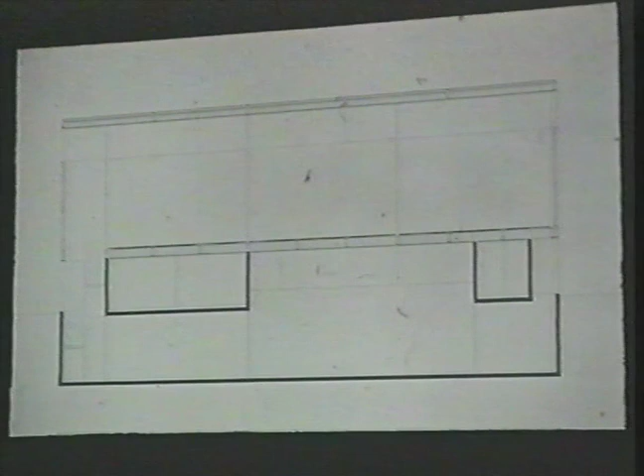In section it's very simple, almost primitive. It shows the line of the garden at pedestrian level, that we have two identical spaces through which we have these two tunnels which cut through. This provokes the reading that we have something solid which stands on these two bars. At the same time we create two identical spaces, so that once you stand in the basement, you don't have the feeling of being in an inferior, less important space. Walking through the building you have a very homogeneous impression, which we absolutely wanted to create here in a small gallery — in a large building that would be terrible, because it would enhance the claustrophobia we would like to avoid, but in a small gallery this certainly is an advantage. You see these two pieces, these two kind of tunnels which cut through what I called the box.

One of these tunnels works as an entrance area, kind of a lobby, from which stairs go up into the upper gallery or down into the lower gallery.

That stair which goes up also reveals some more complex interior space than one would expect from the outside. This stairwell also works as a gallery where very often the curator, the client, Ingvild Götz, starts their exhibitions. In fact, she uses this private gallery as a kind of Kunsthalle, a private Kunsthalle.

For instance, for a show with Cindy Sherman, that's where the stair comes up, and that's one of the first, the first upper space.

The light bands we saw from outside as part of this overall box can be seen inside as a light band which gives daylight from the top in a very homogeneous way. The advantage of this system is that we have walls and ceiling in the same material, which enhances a very simple, very calm exhibition space, which in this case we wanted to have.

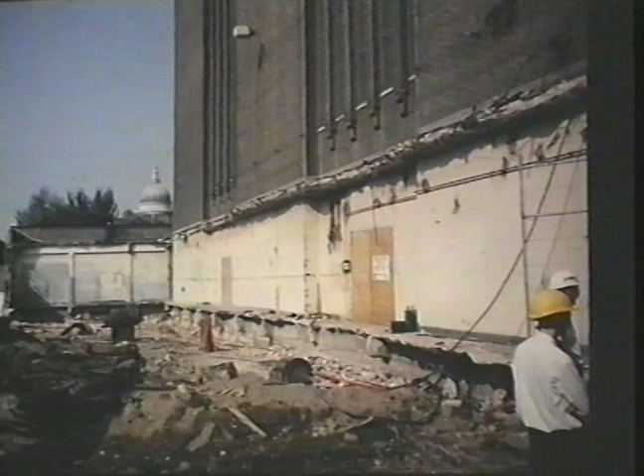Another thing is we take buildings away which were sitting around this big building in order to keep people away. Starting to take these low-rise pieces away, you start to understand this connection towards the city—where is the city, in fact? You start to understand.

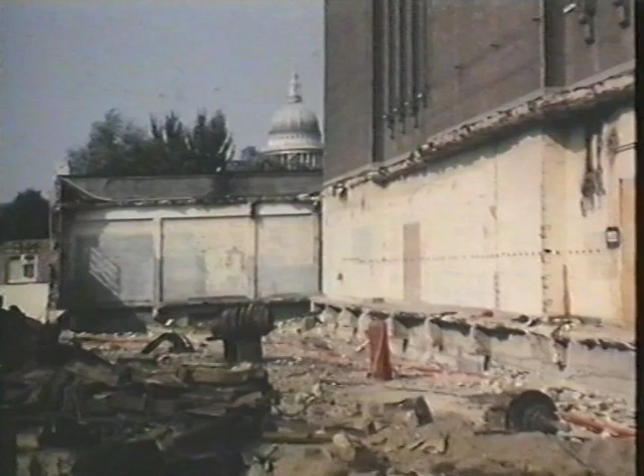And you can see, once you touch this big thing, it's really like digging out a mountain. This was a very important discovery, because we worked a long time on it and tried to change windows and touch the surface of it. Whatever we did, it was ridiculous—it was too strong, too heavy, too massive. So we tried to find other strategies to deal with this mass.

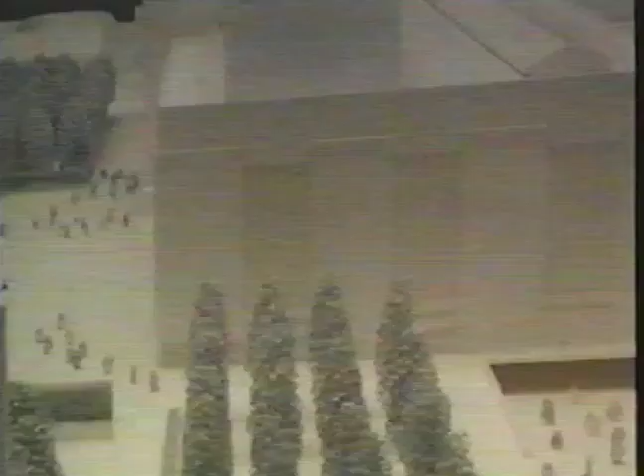We enhanced it, we dug it out. We made a big ramp which enters the building from underneath at its lowest level, which was not existing there. We can see that later. So you walk underneath, making this big mass even more impressive.

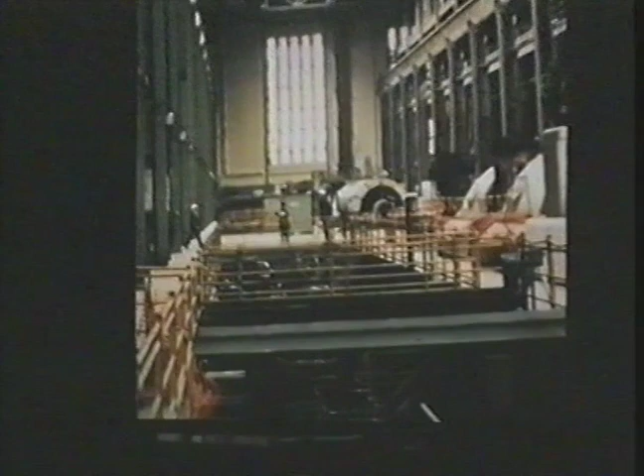We saw the turbine hall and thought, this is an impressive space, but let's make it even bigger. We took out this whole floor, so we literally dig it out and go down into almost the stomach of the building. That's where the ramp goes down.

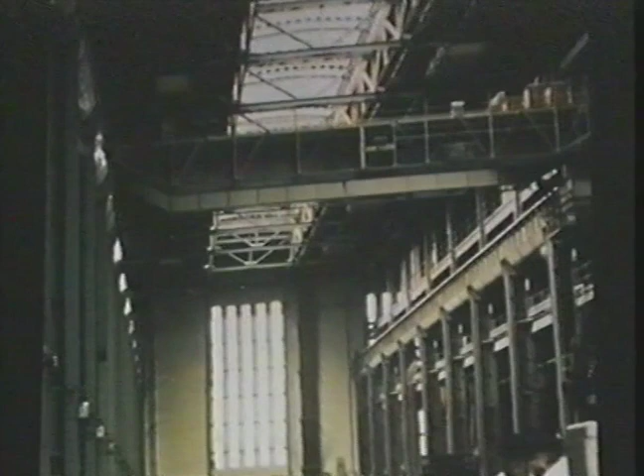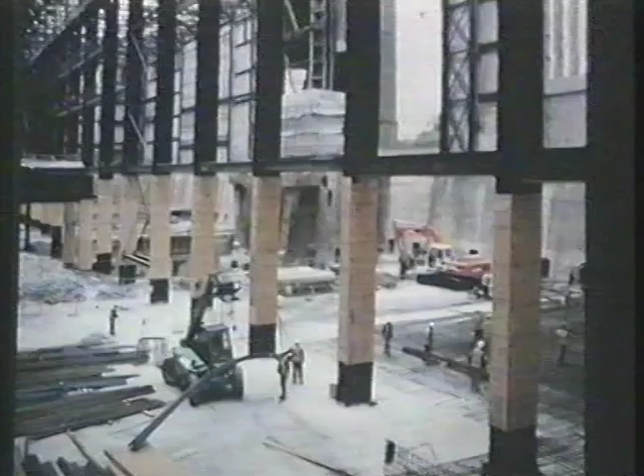This whole space, the turbine hall, the former turbine hall, will remain empty as a kind of big station where people can walk through, take a cafe, or meet people. It also has art in there. It could be big art, large scale, but it could, and that would even be more attractive I think, very small scale art. On that side, which is the former boiler house, the galleries will be fully packed. The void, the empty, and the full.

In the later stage, we will also have galleries on this side, so that going down the ramp you have a whole world that you enter, a city where you can go to different types of spaces, different types of art, different types of meeting points, etc.

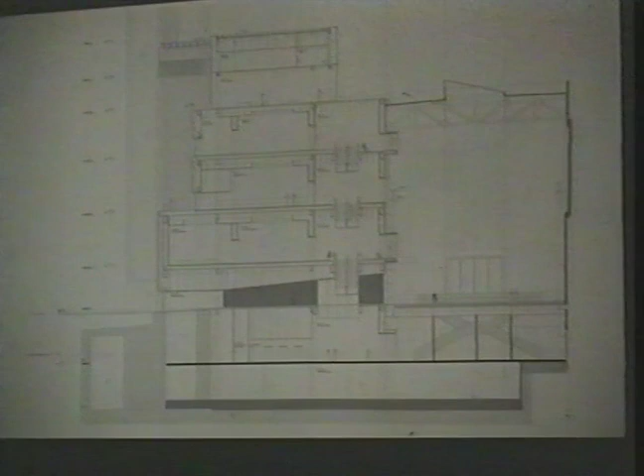This is a section where the switch house is missing, this third layer. This is the turbine hall, which is in the middle, which is empty, and the boiler house, which is packed with galleries on levels 1, 3, 4, 5. This is the top gallery, which all belong together. And this is level 2, where we have restaurant and cafe and auditoriums and different other spaces.

This model shows in which way we deal with the new wall, which is between the turbine hall and the boiler house, and in which way we deal with these massive steel columns, which you mostly see in a perspective way. So when you look from the side, you almost only see these huge columns.

Instead of fully glazing the whole wall, we make it kind of a dark wall through which we cut big windows which stand out, which sort of almost bite through the structure. Those are all glazed big pieces which in some way are from the same family or the same language as the light beam on top.

These are all glass without any framing, all glass pieces, which are also working like big screens. So once you come into the museum, you can look at this big wall and understand where you would like to go and which kind of show you can see.

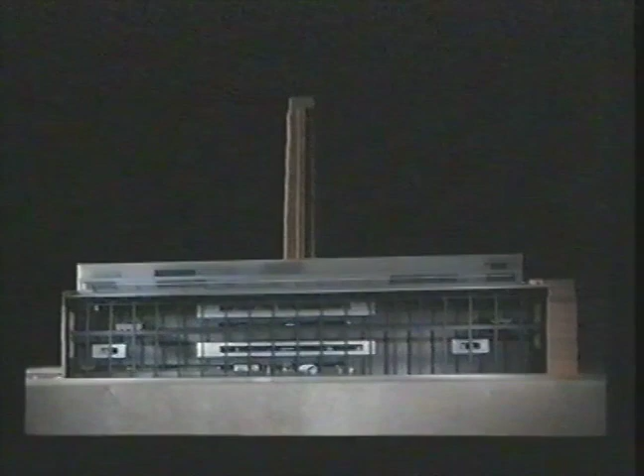When you go down the ramp, you can see these different big windows which show where people are, show the light, and show where the art is. They are like big monitors, like what we have on top.

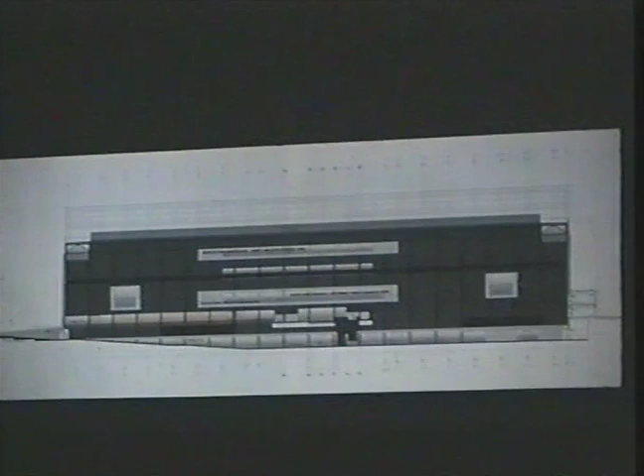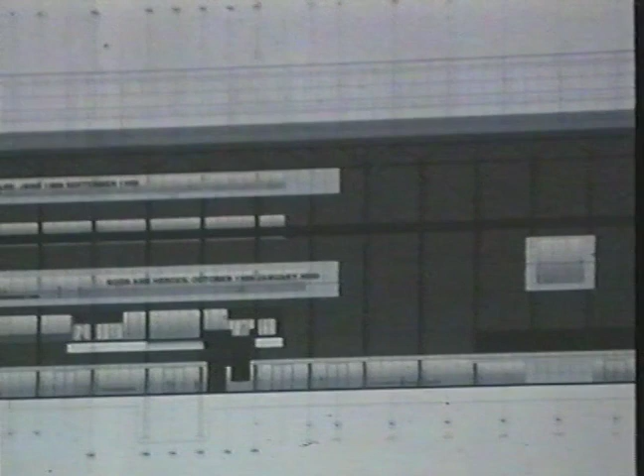So the strategy is to leave these steel and brick pieces and dig them out, and add these glass pieces which cut through in such a way they are even neglecting the existing, because they just literally bite through the steel mass.

The galleries and the concourses and so on and so on.

And one of the galleries which shows the type of ceiling we are thinking of.

It's a gallery type that we have built for a friend, an artist, Zaugg, and where we developed and tested this type of skylight, where glass panels are cutting into, are being put into the ceiling, flush with the ceiling. And again, we have the same quality of the wall also as a ceiling.

We don't have all glazed ceilings like in the 19th century and sometimes in the 20th century, where you seem to be blown through the space, and all these sometimes very expressive skylights, which we also didn't find appropriate for this building.

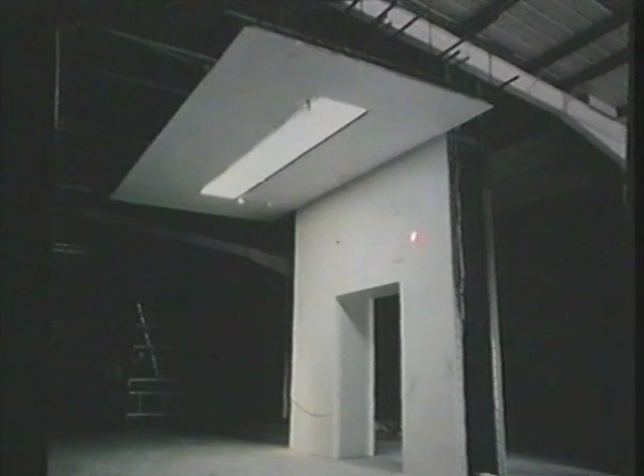We tested, as with everything, full-scale mock-ups where we tested these openings. For the Tate they are much more sophisticated than the ones we did for Zaugg, because they need to fit different requirements for dark space or to deal with the sun and so on.

And those pieces seem to come out quite well. They also provide very good light, very homogeneous light, and they look very simple, very basic, very strong still. We were very happy to be able to do this studio for Zaugg so we could test this and see it in reality. We think it's a very interesting solution for Bankside, which goes well with the character of the building.

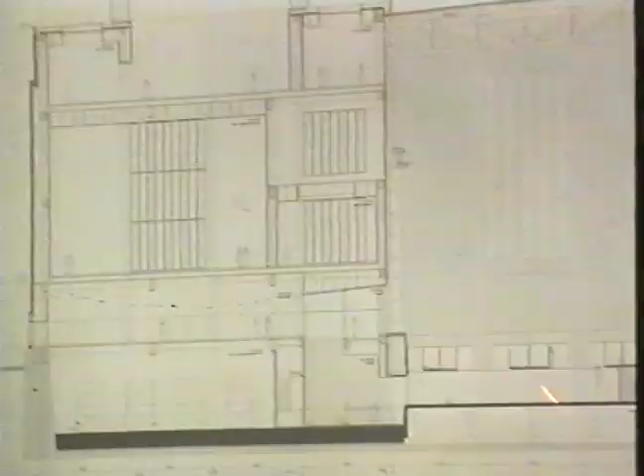You can see those galleries here which have those types of skylights, not only for daylit areas but also for artificial light. So when you stand in the building, you do not really know if it's daylight or artificial light. The light seems to filter through the whole building.

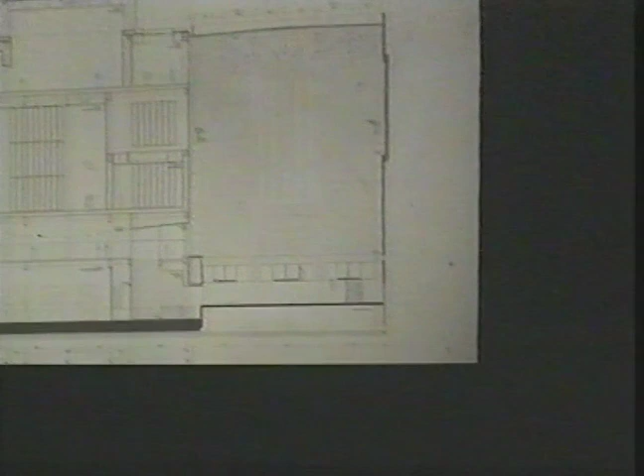We also rejected the idea of having different floor types. We always have the same maximum height, so you can have low or high floor spaces on every floor. You don't have those typical hierarchical museums where on one level you have drawings or photographs, the small-scale things, and then the larger pieces, and the higher up you go, the more you feel close to God. So we rejected this idea and worked on something as intense and powerful on every floor. We even cut into the floors and created very high spaces all of a sudden, 15-meter high spaces, which break the rhythm.

Like here, for instance, which is the full height of the existing cathedral windows of the building. So we expose the existing structure like a piece.

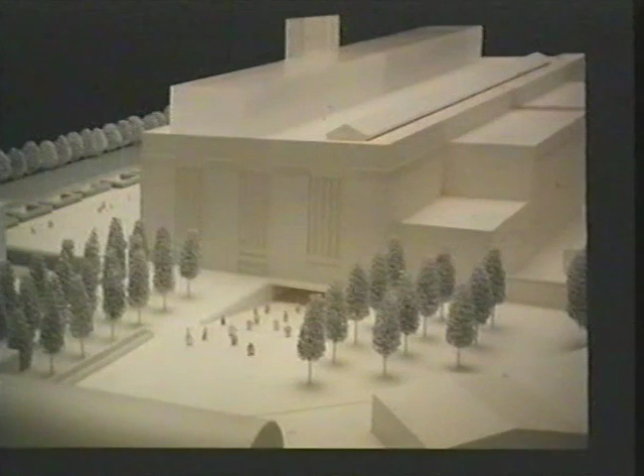That will be this window. So when you come down the ramp, you can see from the outside this huge space, as light shining through the window.

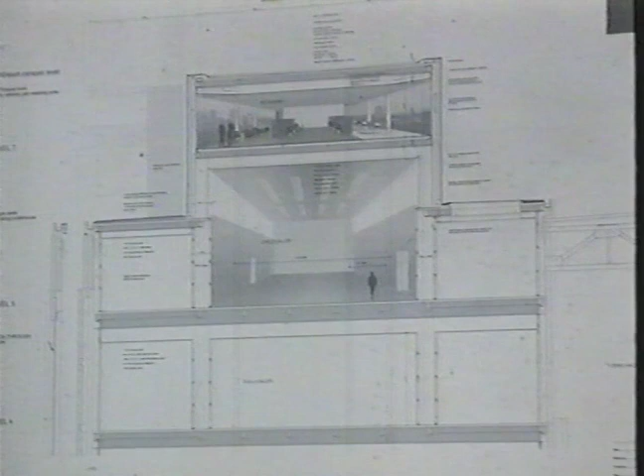The light beam is not just a light box sitting on top, but it has very different types of light in it and different types of spaces. It's like a house sitting and also cutting into the building. This shows in section a similar gallery type to the one we have for the Goetz gallery, where the daylight comes in from the side. At night, light shines through this glazing and provides a different type of light than the restaurant which sits on top, or other spaces.

So that type of glazing will be part of the light box sitting on top of the Tate. That's a model for the light box, which also will work as a screen, as a big screen.

The next project is, as I said, the studio for the artist, which helped us and served as a kind of a big mock-up. This artist studio is the studio of Zaugg. He's an artist we've done several things together with - we'll see two other things we've done together. He's a kind of conceptual artist who wrote very interesting pieces on perception, and we've surely learned a lot from him and done a lot of work with him. This very simple building is in Mulhouse, near Basel, in the agglomeration of the city, on the French side.

The building has two canopies, one towards this wall, which created an interesting space, and one sort of opening to the garden. The water is collected on the roof, as we do for many buildings in the recent past and still do, so that the building is like a natural object, like a stone in the landscape, which then changes over the years.

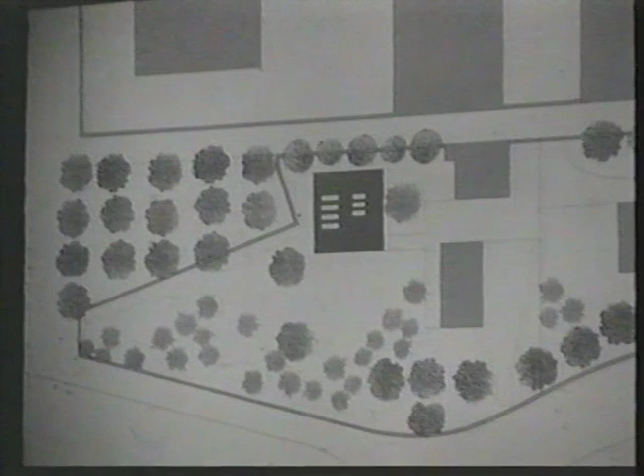Remy worked on a kind of park himself. He moved entire big trees, almost a forest, and worked on the flatness of the garden. He is obsessed with flatness, and he literally did it by hand with assistants. So the whole park, I don't have a slide of that, is like the flattest part of the world almost. And different materials are almost merging with each other.

These are different other buildings he has in the studio. The plan of the studio, storage and two studios. You can see the way the daylight, the skylights, are cut into the ceiling.

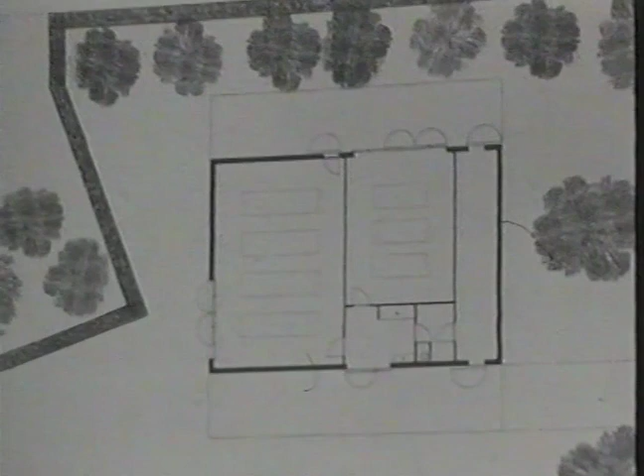The space between this wall and one of the studios, which he sometimes also uses almost like a kind of

museum. He works with text and colors, and that's also one of the reasons why we have often worked with texts in our architecture, in a way where text is related to perception, not as information, not as a kind of pop tradition, but more in the tradition of being like part of the surface, like part of what you see.

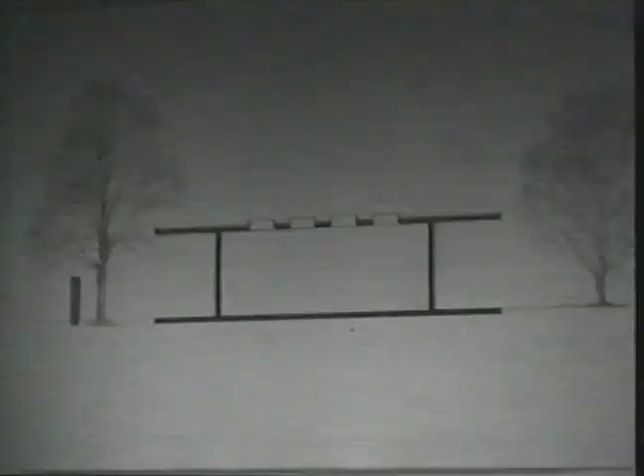In section, you can see the simplicity of these light boxes. And what I said about the flatness is nothing but the extension of the interior space into the neighborhood, done in a very radical way.

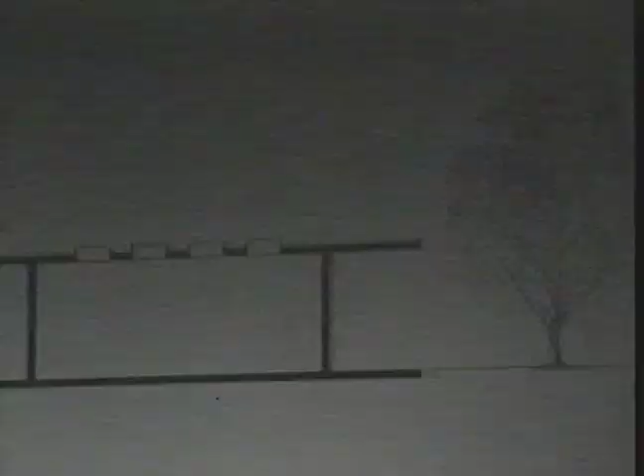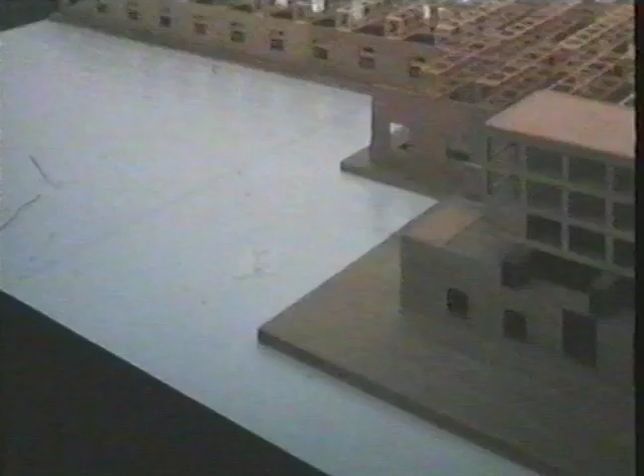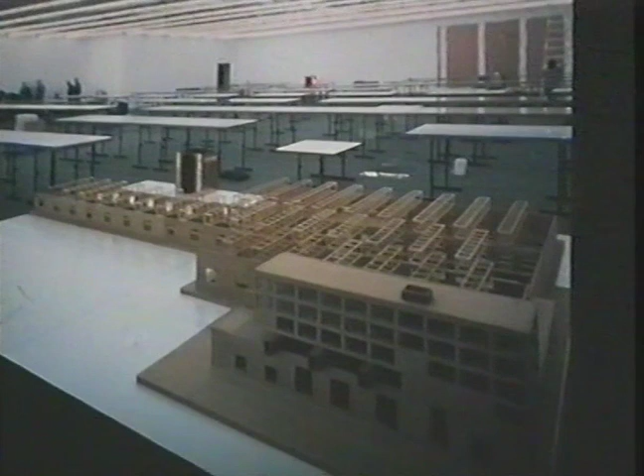The engine depot, the signal box, another signal box on which we work now, and the distance between—which is the distance in time we worked on that, but also the distance in the city. Videos, urban studies.

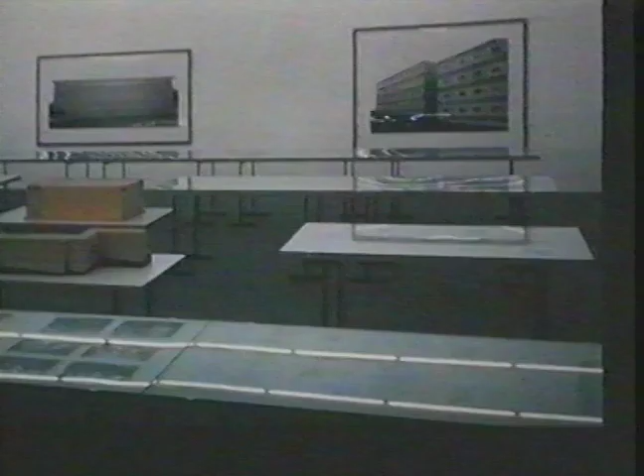Photographs by Thomas Ruff, who's another artist we have a lot of appreciation for and work with. And Rémy Zaugg, 'Mais moi, la ville, je te vois.' You can hardly see the painting.

Next project, which is the urban study I was talking about, the city of Basel with the Rhine River.

The city spreads across 3 countries: the Swiss part, France, and Germany. People live and work in different parts, but they're not really aware that this is like one city. It has Weil am Rhein, which you may know from the Vitra Museum - it's the same city. And the Beyeler Museum, recently opened a bit further out, is also this one city.

The more we worked on this urban study, the more interesting it was to understand the psychological background of that. We did the study more as a way to understand how a city works, rather than to propose specific projects. It was more like proposals to define areas where the city should grow rather than others.

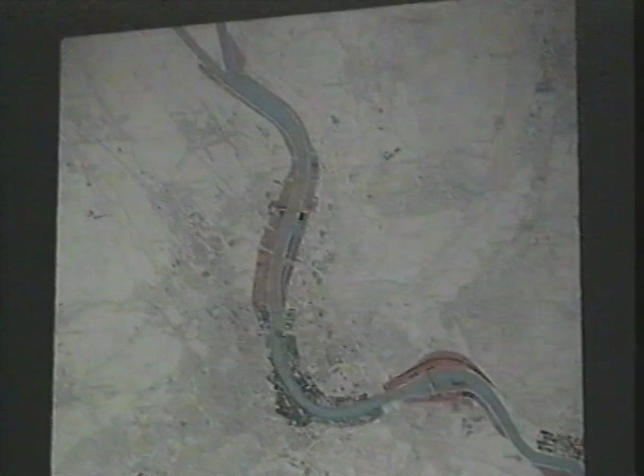You can see that from these buildings, the classical silhouette of a city. So it's obvious to go on with this, to make it the most typical element of a city. But what happened is that as the city evolved towards the north, France and Germany, and even the Swiss part - because that belongs to another Swiss canton already - the neighbors didn't touch the river anymore. They were almost scared, as if the river belonged to the old part of the city.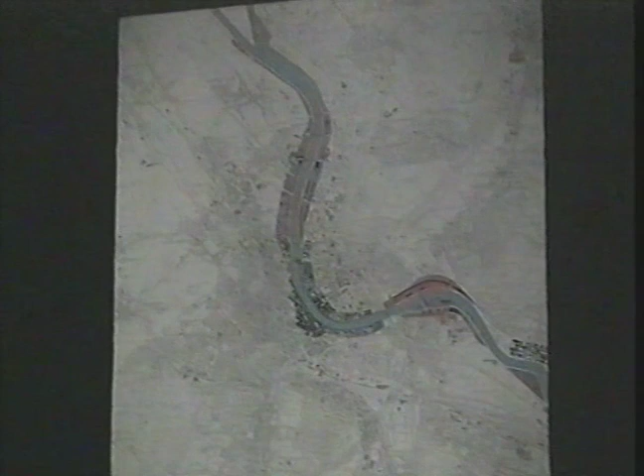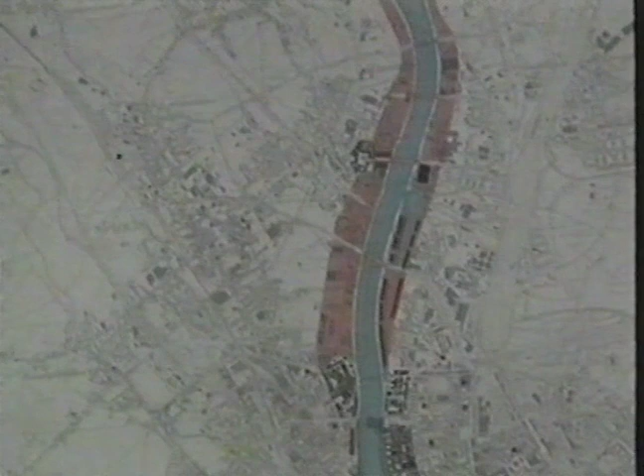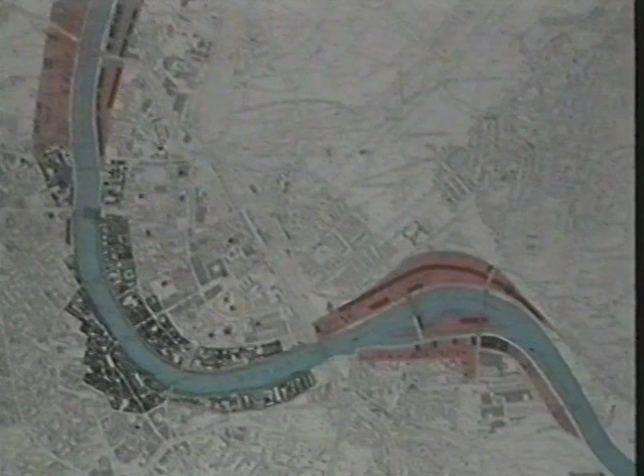In fact, most of the communities in the neighborhood are developing their schemes away from the river rather than along it. So one important element for the future will be to enhance the river as a natural given, and also as something where the city takes part - where the German, French, and Swiss parts show their faces.

Next one. For instance, like this - it's just very schematic. That wasn't so interesting for us, but it shows the forms this could take.

A second scheme we were proposing, a second element which was so evident, is the railway tracks. That's what makes the city special too. It has the German railway system, which you may know because everybody has once gone from north to south through here. And the French railway track system comes together at the Swiss station, then moves toward Switzerland or Italy.

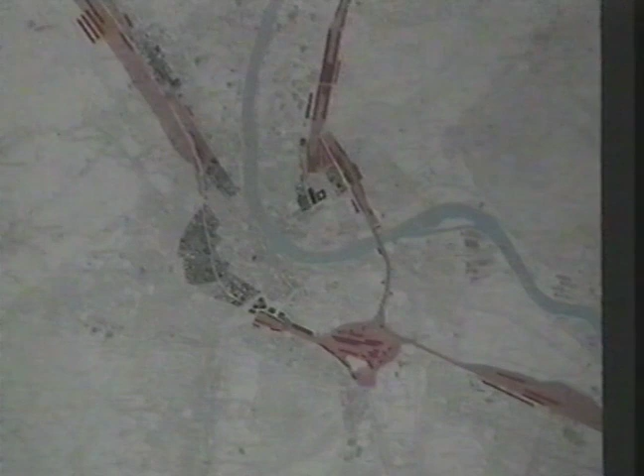The idea was to turn these fields, or the areas along these track fields, into strong urban elements, like strong vectors, so that the Rhine and these artificial river systems would create strong pieces within the overall city scheme. Such as this.

What we tried to express at the end of this study - it's a very long study and I'm just showing a few slides, we also worked on the side valleys - is that in the end the city expresses itself according to specific topographic and artificial elements which have, over years, decades, or centuries, become strong rather than others.

One extreme example is, of course, Venice, which fills out every square meter. Of course it's an island, that's why it's so clearly visible. But it's interesting as a model which fills every square meter and which, in fact, cannot be changed anymore. It's in fact a dead city, and you get this feeling of a dead city - it's beautiful, but it's dead. It cannot move anymore. But in the end, the city has grown into this shape.

This shape has an effect back on the people and also on the visitor, like a psychological pattern. You can understand everything, but the city cannot move anymore, not even a square meter. Paris is a bit like this in the center too, but for a different reason - it's almost a crystalline pattern which cannot be changed anymore. New York is similar to Venice, and there too you sometimes have this feeling of death, even though it has areas which can be changed, which can alter the character a bit. You can make it a bit nicer, but you cannot change it radically without a tabula rasa.

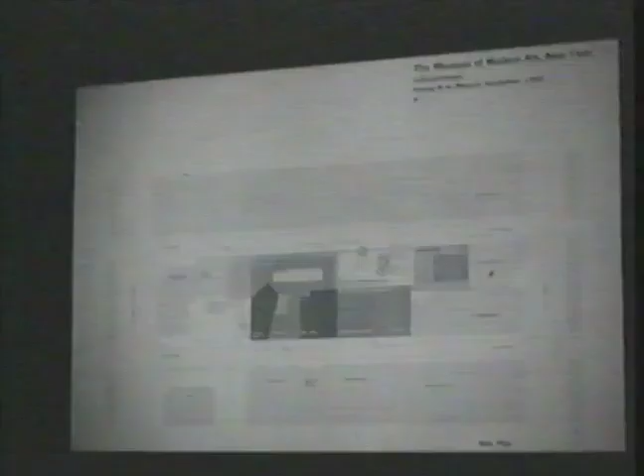The scheme is very simple: 53rd Street, 54th Street, 5th Avenue, and 6th Avenue. This is the old MoMA, the existing tower, the garden wing, and the garden. Most of the existing buildings have gone and will go.

What we did is arrange the galleries around the garden on two floors only, so you can come in around the lobby, which is double height as now, where you have art, walk around the garden and have art on the first floor, go upstairs, very simple, and have galleries right on top, on two floors, all around the garden.

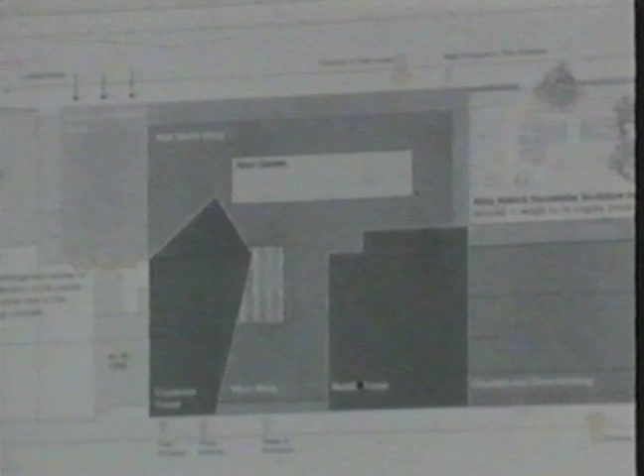All of which is curatorial would be in this building, which overlooks the whole area and is connected with the galleries through two courtyards, which sit on top of the galleries.

As I said, I don't want to explain everything, but this shows you briefly the Goodwin Stone building, which is the actual entrance, where we also provided the entrance, and also an entrance from 54th Street, so you can walk through the whole complex.

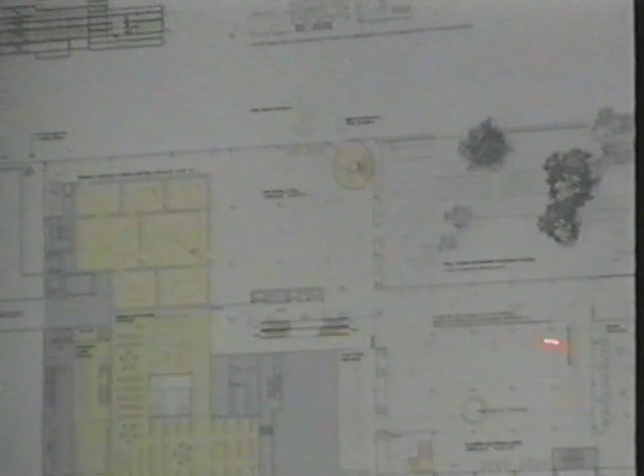Philip Johnson's building would be turned into a virtual museum. We have those round forms indicating the spaces, the stair and the big eye, as we called it, where you can look down into the basement, where we have three cinemas—one existing and two new spaces.

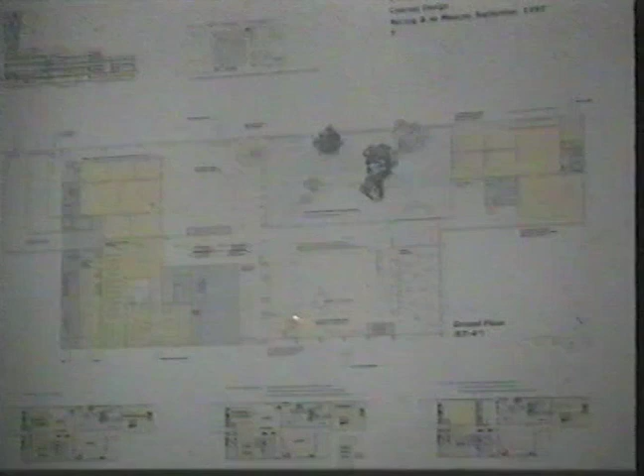When you come in, you have the garden in front of you, which is upgraded because it has art around it, and everything is embracing the garden. You have proximity to the galleries, to the cinemas, to the restaurant, and to the shop, as well as to a contemporary gallery which starts on the lowest floor.

That's the lobby, which has changed and which we wanted to turn into art space, in a way that the sculptures in the garden would historically be expanded. I mean, the sculpture exhibition would be expanded historically into the lobby, so that the sculptures which are now stopping with 1950s sculpture or even earlier would come into the lobby up to very recent sculpture, Jenny Holzer and other sculptures. So the whole garden would sort of expand onto the street.

Next one. The upper floors, third floor, and the narrative, etc., etc. Next one.

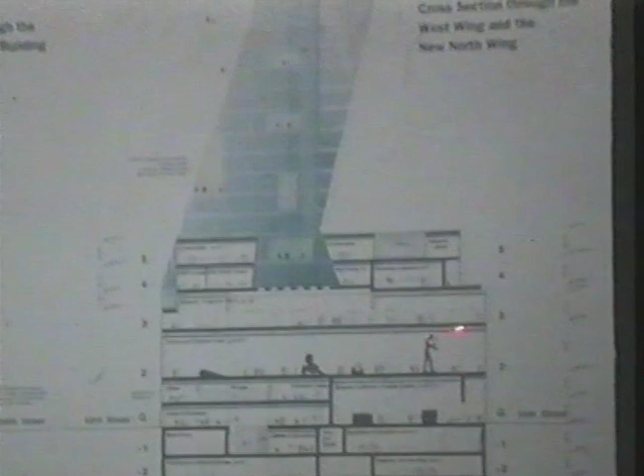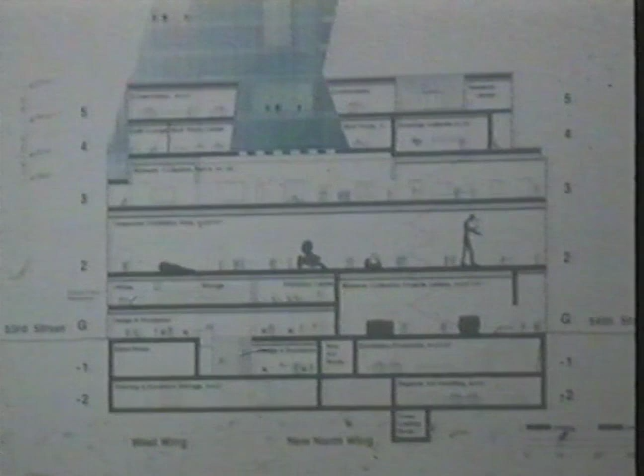And the section which we worked on in a way that you can have, within this very urban type of museum, spaces which are almost loft factory sizes, which would cut through from 53rd to 54th Street with a height of almost 10 meters, so that you could create spaces like in Marfa, like Judd has done in Marfa, in such a museum. That was a proposal for an exhibition for American sculpture in the 20th century. That's why we took the Jonathan Borofsky, just to show the scale of the whole thing.

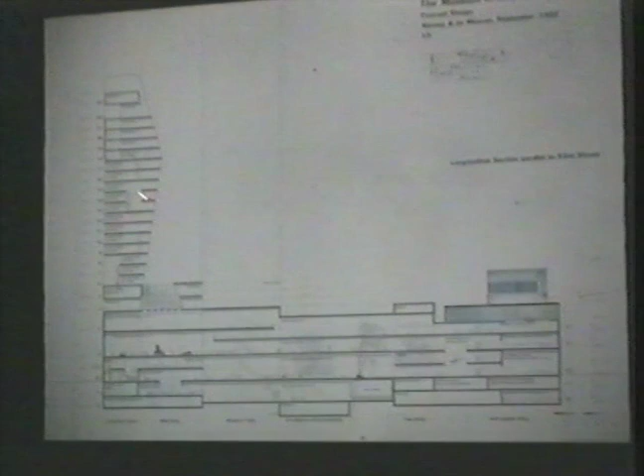Next one. Another cross-section, and the way how the tower evolves over the different floors and has different floor heights, and these sky lobbies I was talking about.

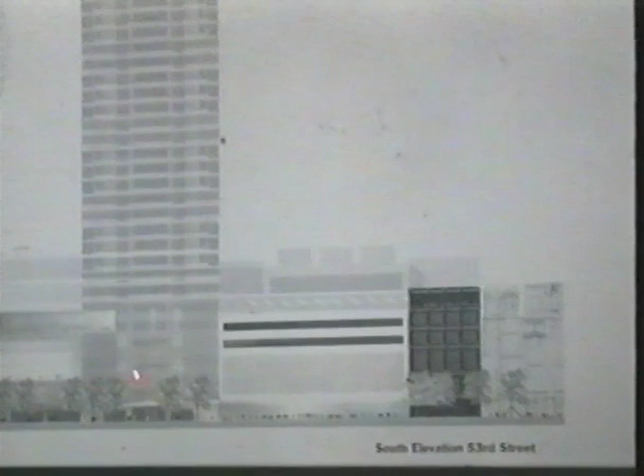53rd Street, the existing entrance, the new entrance, where because it's higher, you would get the feeling of the garden from the street, the through space I was talking about, and the curatorial tower.

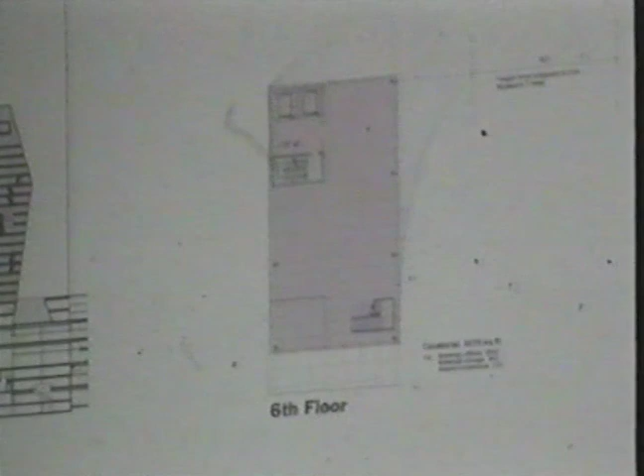Let's show a few images of this curatorial tower, because it's an important aspect, I think, which we work on in other projects, in other new projects, which shift from rectangular forms into other forms, let's say. In this case, all these lines could be defined through, as I said, air rights and zoning and so on, but at the end, of course, we were interested in creating this specific form.

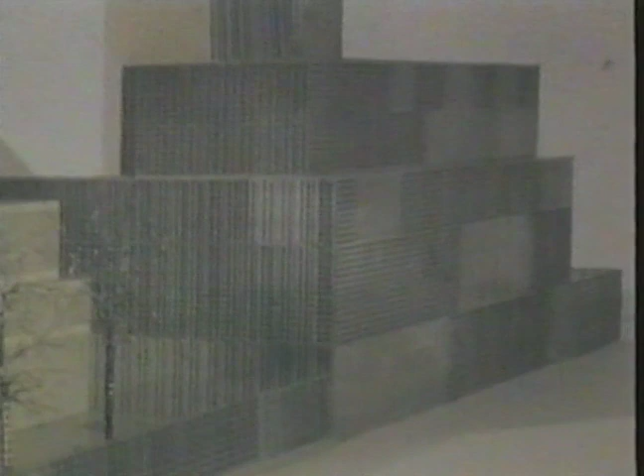Next one. From 53rd Street and 5th Avenue. Next one.

And we walk around the tower, to understand that it's difficult to understand the shape, and that we in fact did everything to cut the shape, to cut the image, the clear image you could have from the shape.

Next one. What would be the material? Glass. It would be glass and printed glass also. It would not be transparent everywhere, because it also has storage and offices. It's a mixture of different uses.

Next one. That's from 6th Avenue and 53rd Street. Next one. And again from 53rd Street, where you can see where it starts on a very narrow spot.

We think it has to do, it could be related to the signal box, which is not a tower, but it is a tower-like piece, where also we did everything to sort of hide, or not hide, but maybe blur the clear edges of the building with the way we treat the facade.

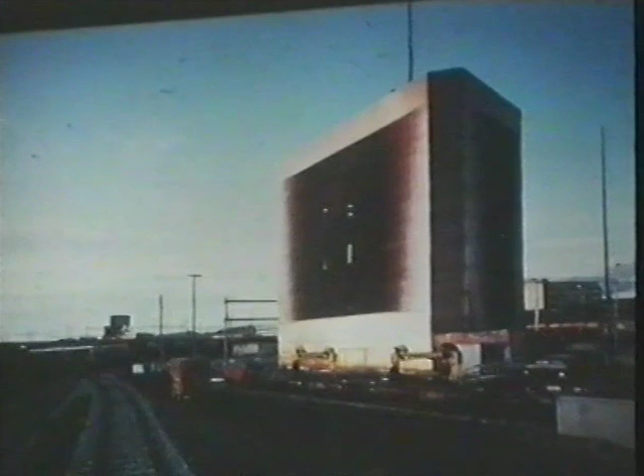Unlike in earlier signal boxes, people don't look from inside out onto the world. The world is not the, might almost say, analogical world, but it's a digital perception of the world, which happens on the monitor, which is inside. And that also we wanted to express.

You can see in which way it is not quite a rectangular piece, but the way we arranged the copper bands, and we also wrapped it around some mechanical spaces, it loses the only rectangular shape it could have.

When the night falls, the light from inside gets stronger, and it reveals the fact that it has floors and some windows, and all of a sudden it's connected to normal buildings.

And at night it's not connected with normal buildings anymore, of course. It's then really a totally independent piece in the midst of these railway fields. It sits very close to the engine depot, which I showed in the model, which in its character is very different. It's more industrial, more down to earth, kind of a building type.

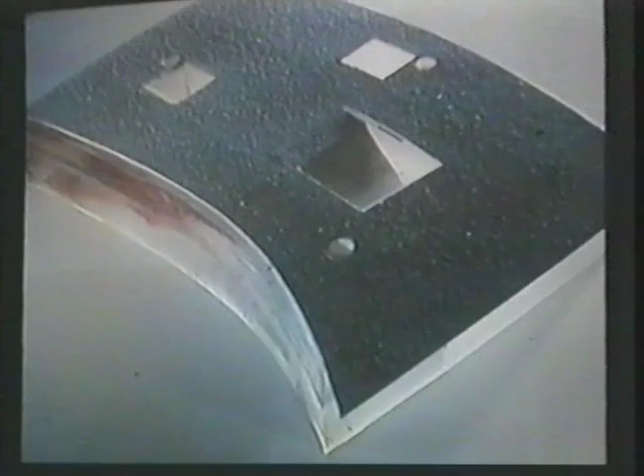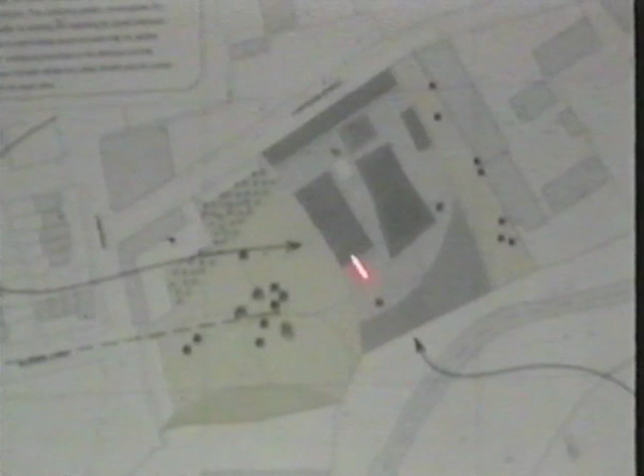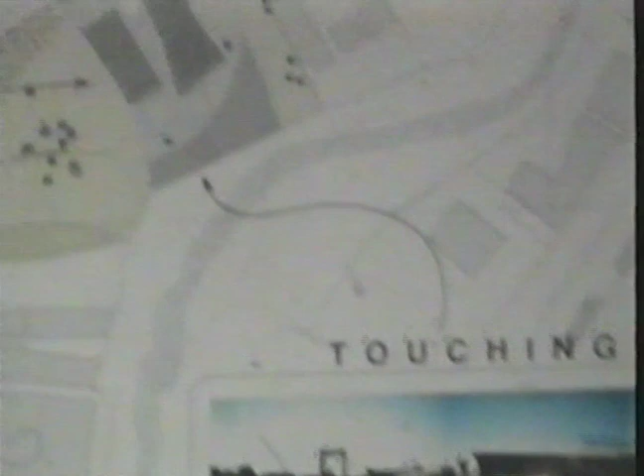This is the building, and that's the new site, which we all do ourselves. So we invented the park, and the park relates to the building and to the shape of the building. This round form has to do with the kind of park we do, which also has a slope, so that walking up the slope through the garden you perceive those tubes which sit in two rows, and then you walk over and the whole building starts to move, has a certain movement in the building.

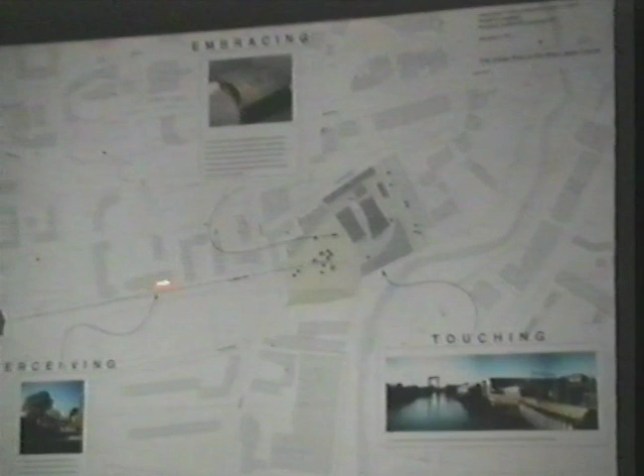So the garden and the building relate, and together this embracing gesture has to do with the garden and also with how the building relates to the few elements it has in the neighborhood. It sits on the creek, it sort of touches the creek, and the way we arrange the trees also allows for a special perception of this little church, which is quite an interesting piece in the neighborhood.

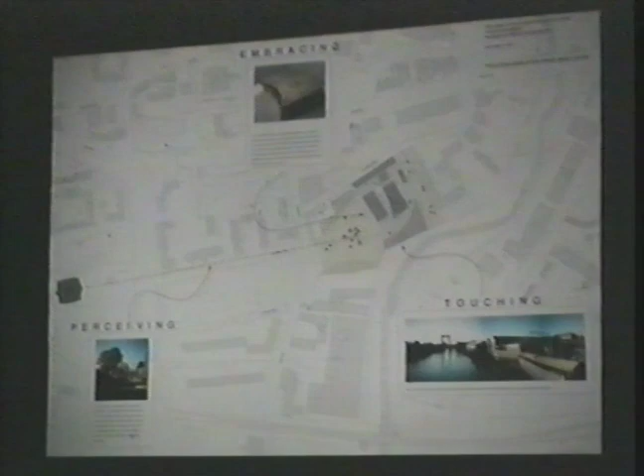So the facade, the curved facade, and the building become part of the neighborhood through these three types of gesture we sort of invented for that part.

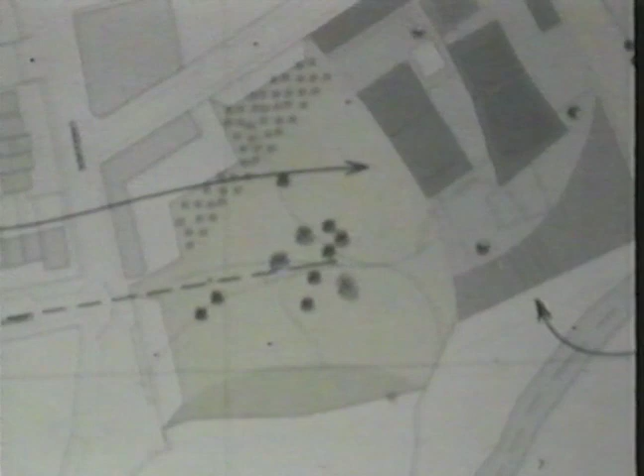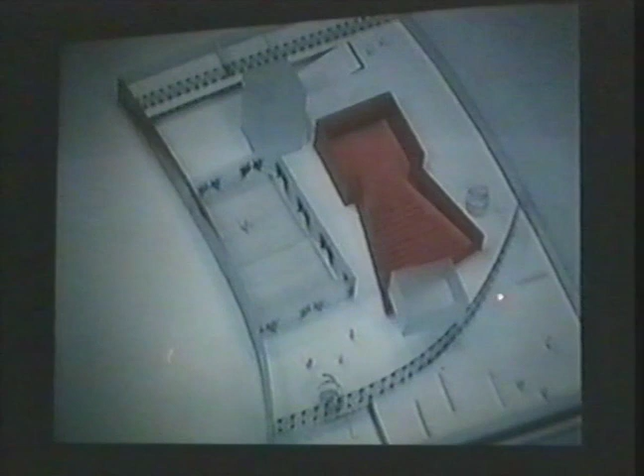The ground floor, it has two floors. The ground floor is a very open landscape type. In the middle it has a theater, which is like a heart, red painted and fitted out, a dance theater where they will have public performances. It has a library, accessible through this ramp where you go up. This has changed now in the design—now we have a ramp which goes up, and then it has the library which sits on top of other spaces. It has two studios, large studios, which are cutting into the building, and it has an auditorium and administration, and it has three very large stairs, like huge screws, about 7 or 8 meters wide, which cut through the building and connect the two levels.

The top level is the studios, which are densely packed, like two different city types—a more modern Corbusian type, and a more older type on top.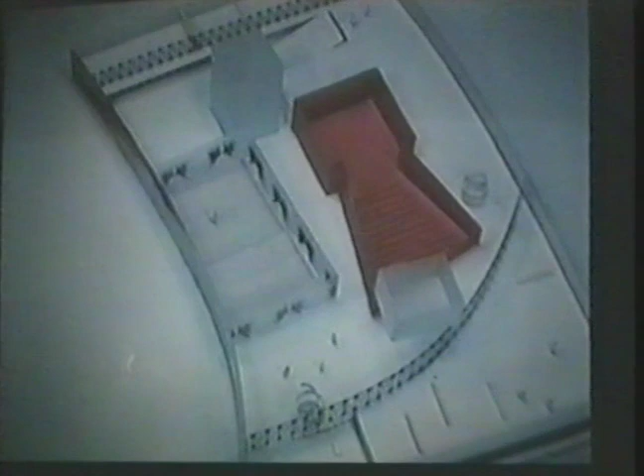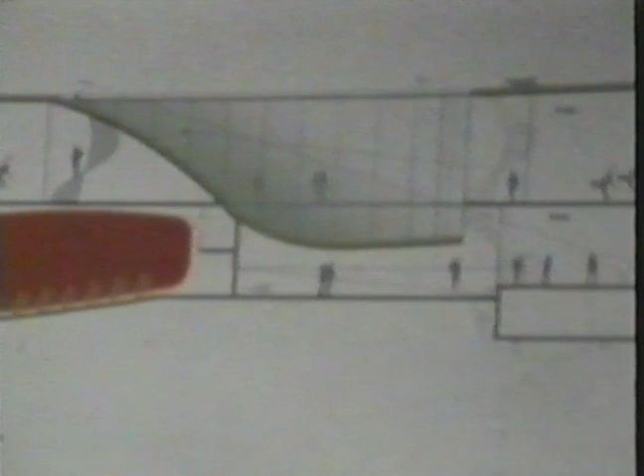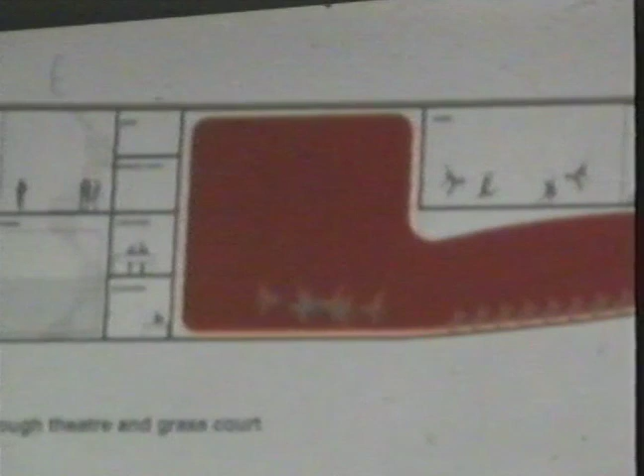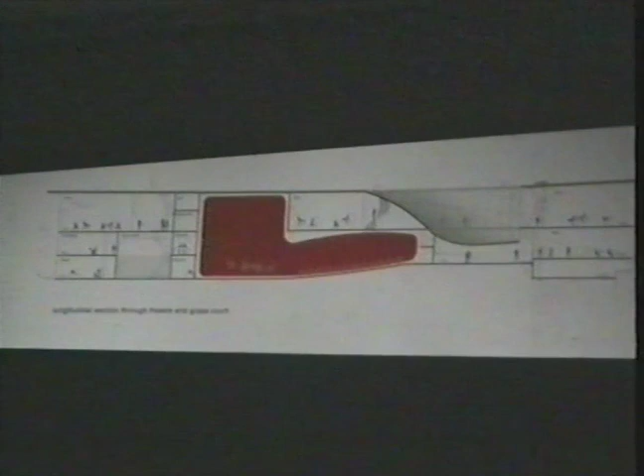In the section you can see the theater, this ramp where you go in, the library, and the dance studios on top. It has three big courtyards cutting into the building, which are curved like the building outside, so that as you walk through the curved facade, you also perceive the curved surface of the roof and of the courtyard, which lands in front of the theater. It's like a canopy or a big chandelier, because we'll glaze this courtyard and have a dense green landscape in it.

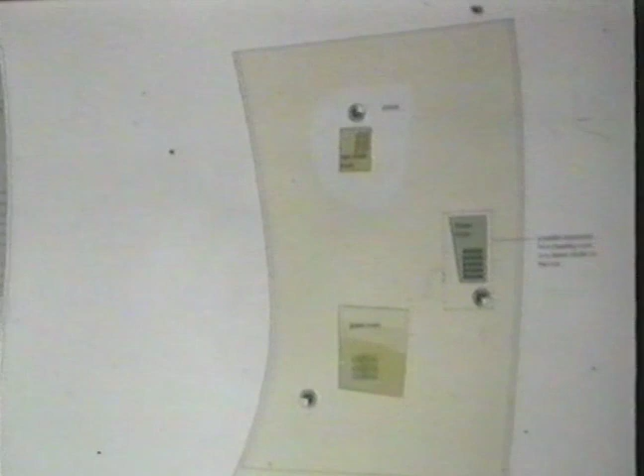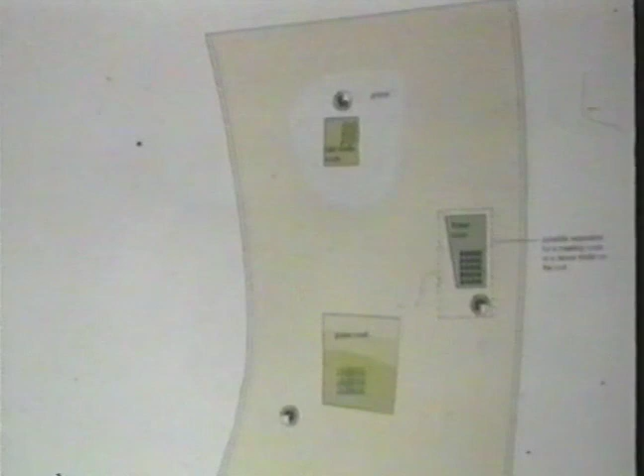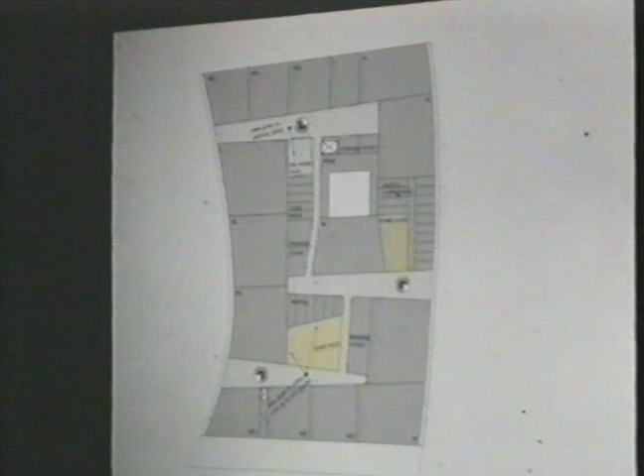We have three different types of courtyards. This one lands in front of the theater. Then we have the grass court, and another one which is the rainwater court. These three courtyards cut into the building with different depths. The rainwater one cuts all the way through, and that's where water from the roof falls into the building. The top floor has three wedges where different stairs land or arrive, and as I said, those are more spiraling architectures than actual stairs, with little streets linking these wedges.

And those are the dance studios, which are glazed here and here. Next one.

As I said, the screens, or the inside-outside relationship, are in this case also the connecting element between the different projects. We try to do that in many different ways according to the places and the materials and whatever we can take to use and to do architecture with.

We used local stones that we put in gabions, steel mesh cases you may know from landscaping. In Switzerland they use it to prevent erosion; they use it in Asia and Africa, everywhere. We found it a very interesting method to build walls, and working on that, we found you can pack them very densely and create a very strong, almost solid wall, which deals very well with the tremendous heat in this valley.

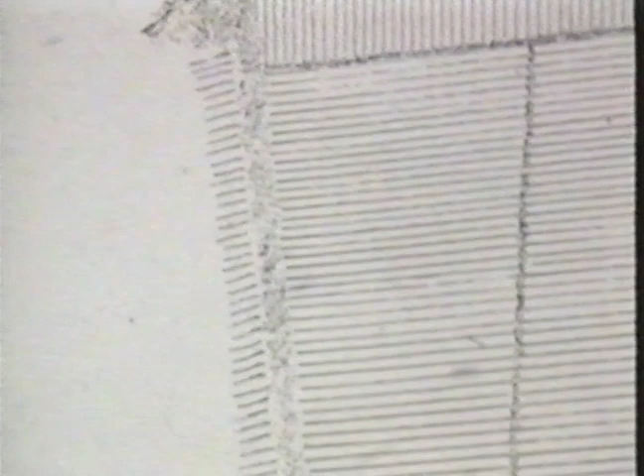The building sits here, we inserted it in the vines, in the vineyard, which is a very interesting element in the landscape, almost like a text. That's why we chose this very simple form, which continues this reading. In a second phase we will rearrange that, build a bridge, and enhance this central axis which runs through everything, a very practical way to deal with the grapes. In fact, it's like a farm building. Next one.

It's a farm building which has a tank room where the grapes come in, barrel cellars, offices, cellar masters' rooms, tasting rooms, and storage rooms. As I said, the landscape is so beautiful, and we took quite a while to understand what we could do there. At first we were shocked by the beauty of the landscape, but also by the quality of the wine. Next one.

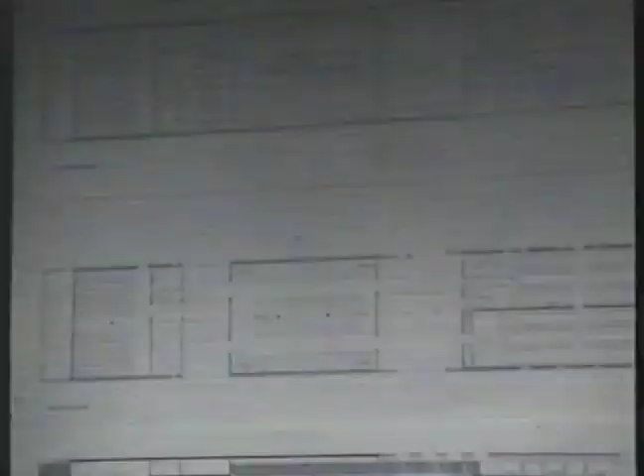The wine is so fantastic, and it's done by French winemaker Christian Moueix, who does a famous French wine and has done this American wine for 10 years before deciding to build the winery.

This is the plan, the ground floor with this main arch, and in the center it has the tank room where the grapes go first. Then they go into the barrel cellar, first year, then second year. These are smaller spaces for cellars. This is a tasting room, and that's the storage, the wine library on top, the tank room again, and the offices, which are fully glazed.

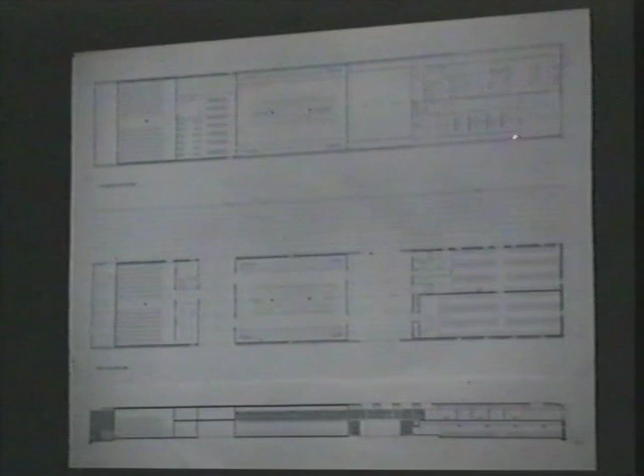The building is about 120 meters long and almost 10 meters high.

This is the main arch, one of the entrances in the upper floor. The linking corridors between the tank room and offices.

The barrel cellar, first year.

It always has these wonderful views into the landscape, and we try to understand which areas on which floor we would like to sort of screen.

I think this image shows best what we wanted to do, that we have this tremendous solidity and almost archaic architecture, which is almost like an African architecture where the steel is working like ropes, and at the same time, when you walk through the building, the same thing becomes so light and is nothing.

These two sides, or these different sides of something that we perceive or believe is like this forever, we try to question. And truly, I think in this way you walk through the building, you literally can understand that.

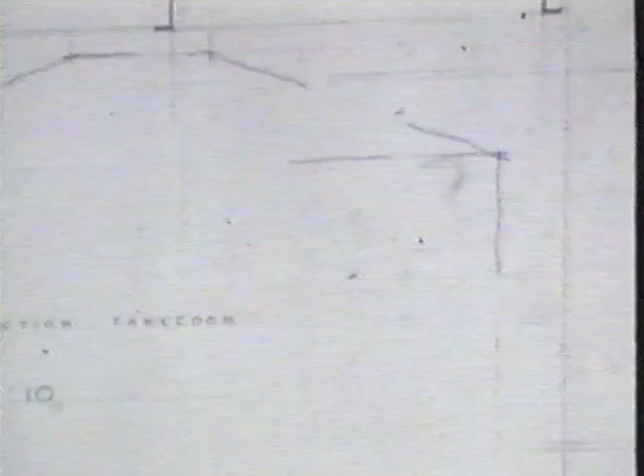In fact, this has rattlesnakes, and that can be quite a problem. That's how the walls are being built, held back to steel or sometimes concrete walls, according to where you are in the building.

The snakes can jump up to a certain height, and we wanted to keep the snakes out. The Mexicans who work there, they kill the snakes and eat them for lunch sometimes. But we still had to deal with this, that was a serious issue.

We had to go through tests to figure out what we could do, because we wanted to build this wall and keep the snakes away. So we bought a snake and put it in a cage in a steel mesh, and on the other side we had a rat, which we also bought. We tested the quality of the mesh and in which way the snake could be kept away from the rat. When we came back the next day, the snake had gone, but the rat was still there.

In fact, the rat had eaten the snake, because the snake could not go through, but it could bite into the tongue of the rat, and the rat could bite into the tongue of the snake and literally suck the snake through the gabions.